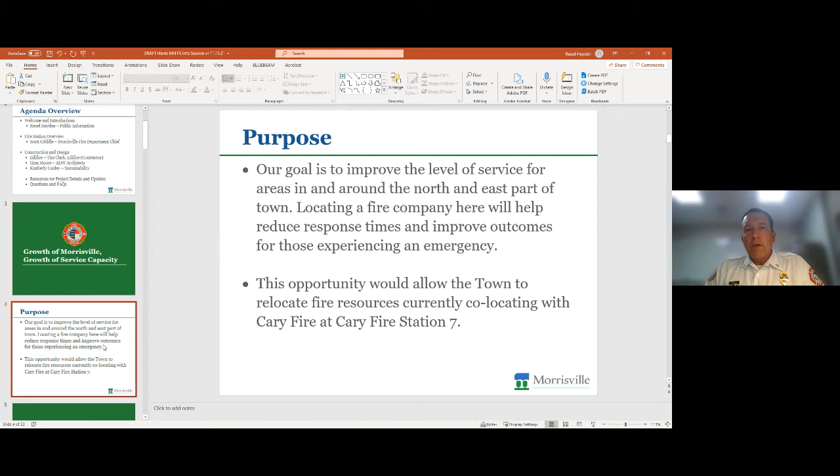Chief? Okay, Ruel, thank you for the introduction. If you would advance the slides to one more. So in general, the idea for adding another fire station is to improve service. The closer we can have a fire unit to every location, the more likely we are to be able to provide a better outcome in the event that you have an emergency. So ultimately, whenever we place a fire station, it's to improve the distribution of our units and improve outcomes.

This particular opportunity also allows us the opportunity to relocate a unit that is currently co-located with Cary Fire Department out at Fire Station 7. We do have some county responsibility; it is a paid-for service contract, and we have a unit out there co-located with Cary Fire Station 7. But we do have a seamless response set up with the Cary Fire Department that would allow us to improve the overall system distribution by relocating that unit into town, which benefits the town. Normally, when you add a fire station, you would end up adding a company at the very least, and in this instance, we won't have to do that.

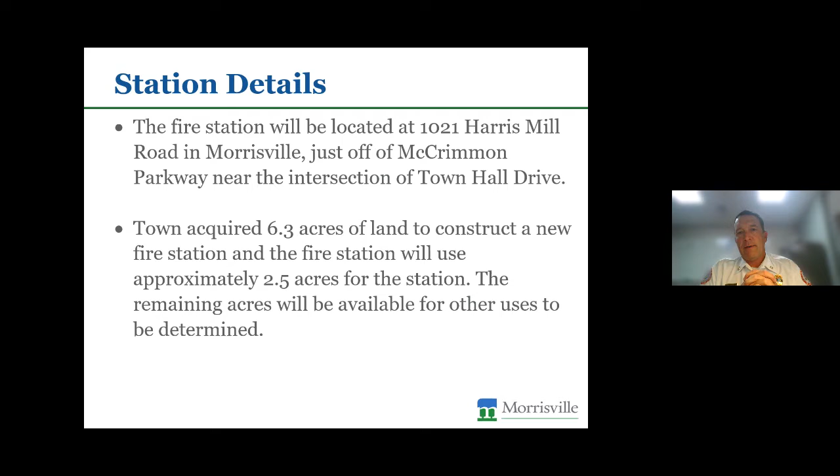We'll go to the next slide. So some of the station details: the station's going to be located at 1021 Harris Mill Road, just off McCrimmon Parkway, between Davis Drive and Town Hall Drive. We have acquired 6.3 acres of land to construct a new fire station. We're going to use approximately 2.5 acres of it, and the remaining will be available for other uses, but those uses haven't yet been determined.

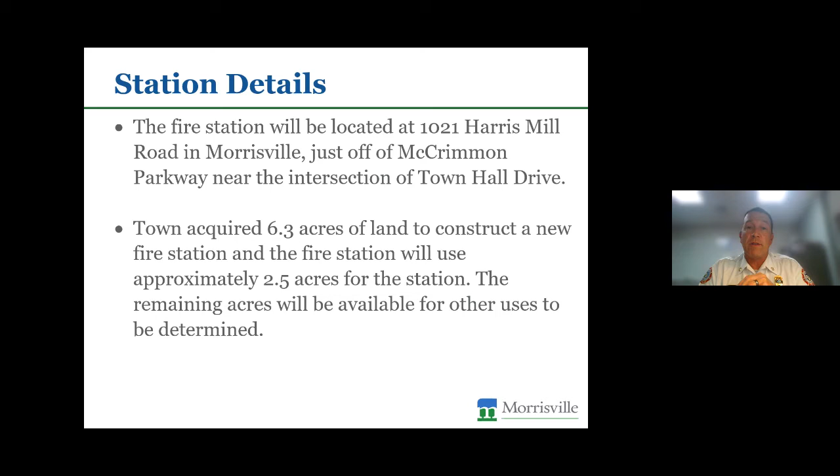Next slide. So currently, the building has been designed. It's moved into the construction drawing phase, and we landed at around 15,700 square feet with two double deep bays, office space for the work that's done there, living space, and personnel quarters. It's currently built for 9 staff, and we'll talk about staffing in a little bit, but it is built for some future expansion. It's built to have a battalion chief stationed there, and there is an additional half deep bay for EMS, with some dedicated EMS space.

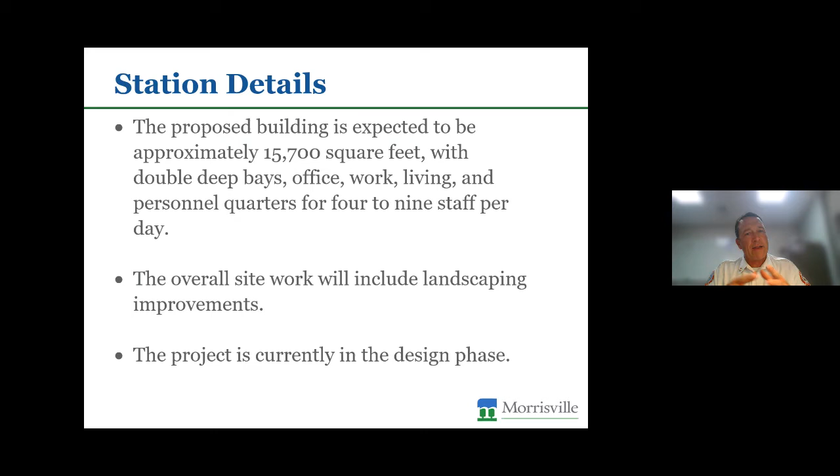The overall project will include a bunch of landscaping to make it compliant with the UDO and for the appearance to be proper. Like I said, we are just coming out of the design phase with this, and we are getting ready to work in — I think we've already applied for the permits, so construction drawings are actually drawn at this point.

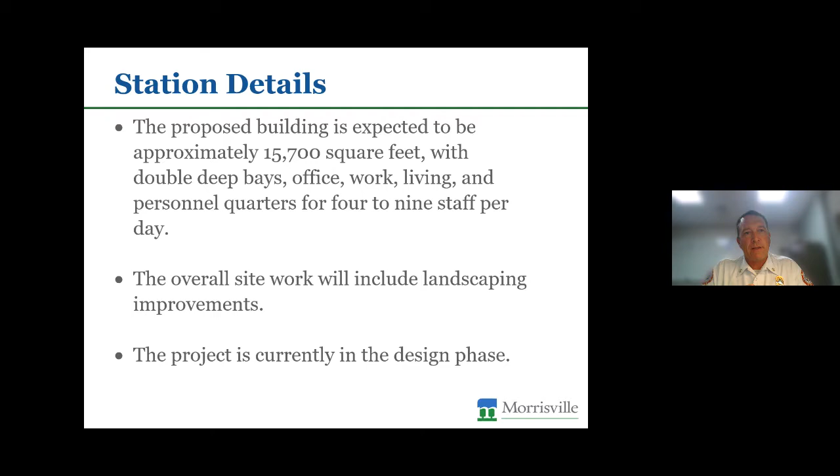So we're going to talk a little bit about fire station operations. These are probably some of the most popular questions that we would expect. The call volume out of this particular station at the moment — right now we're proposed to have one fire unit, a ladder truck, a battalion chief, and there's a Wake County ambulance proposed to go there. I don't have the exact data on the call volume of the Wake County EMS unit, but they are very busy.

But with that, oftentimes I will say that they do not initiate as many calls from the station as you would expect with as busy as they are, because a lot of times they receive their calls while they are returning from other calls or trying to clear from their last run. The fire unit that would respond out of that station will have relatively light call volume. It's hard to predict exactly because they're going to be moving out of a more rural area and coming into town, so some of the volume that comes out of that station will be taken off of Station 2 and Station 1 respectively. We expect there to be no more than 2 to 3 calls per day on average. That's a difficult thing - some days they might not run a call at all, or they might run 6 or 8 calls in a day. There's no telling, but on average we're expecting 2 to 3.

And the good news really is, with most of our calls throughout our district, most of them happen during the daylight hours. We can go to the next slide.

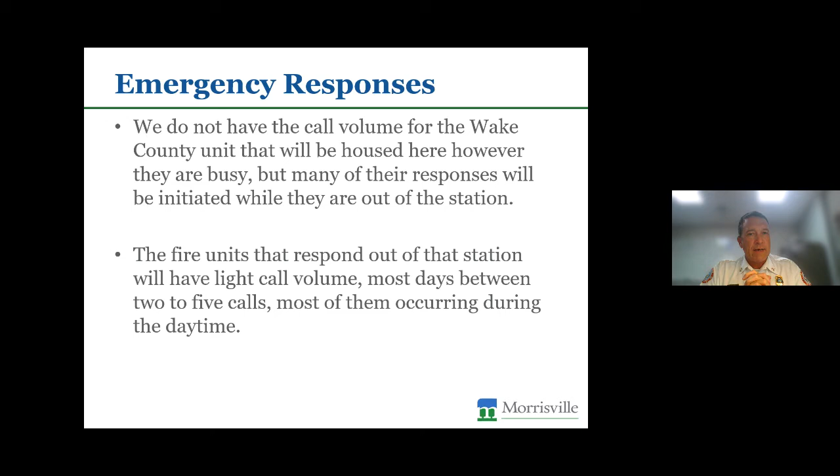Routine activities that happen in a station - obviously we put a premium on being ready for calls. So every single day our equipment's checked. Our shift transfers around 7 o'clock, and shortly after that, the crew coming on will make sure that the truck runs, it pumps, and all the systems operate. So there will be a brief system check in the morning. Daily, all the tools will be checked, though most of that happens just a while after the original shift change. The trucks will be washed.

Training will happen daily there. A lot of times the training we do will require the use of the ladder or the truck's pump, so the truck will have to run. But the training that creates any noise would typically happen during the middle of the day, and to be quite honest, it would not generate any real significant noise beyond your standard background. Especially if you live in Morrisville, we have a lot of standard background - planes, trains, and automobiles all the time. If you're outside trying to communicate, you're familiar with it. But I would say that the presence of the fire station and the general duties would not even approach that level of noise, not even close.

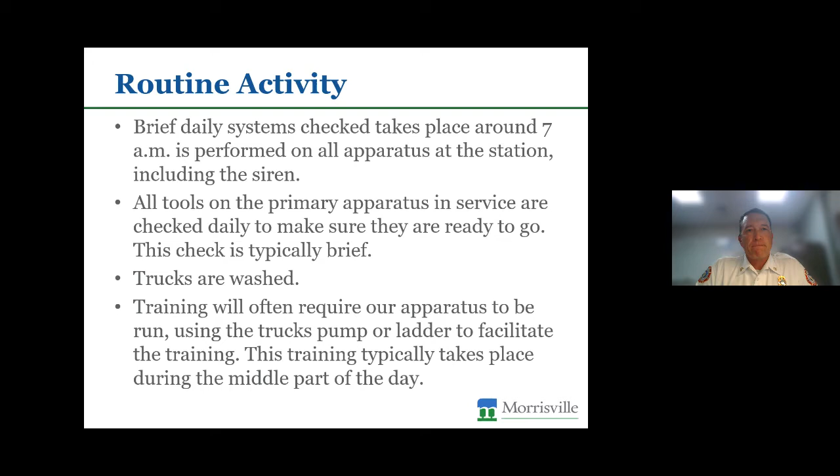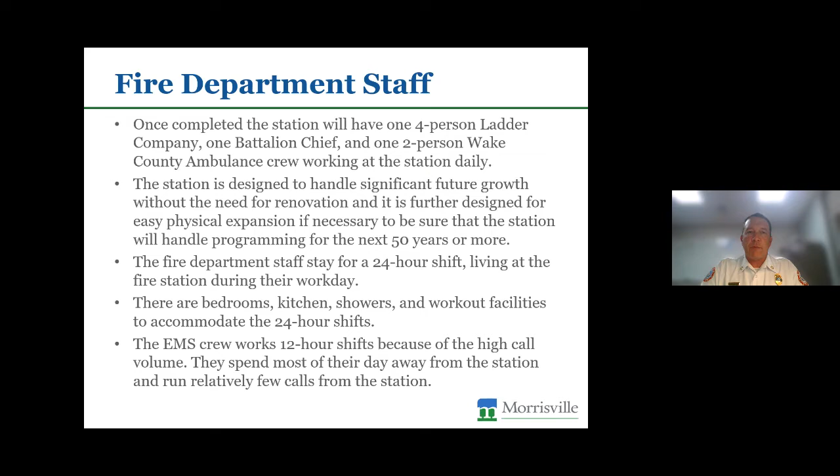So fire department staff that we're expecting in the beginning - although it is built for future expansion - we anticipate one ladder company to be stationed there with 4 people at its regular staffing, 1 battalion chief who will ride an SUV type quick response vehicle, and then 1 2-person ambulance company. There will be some spare apparatus there, but that'll be the primary staffing at the station. However, like I said, the station is designed in case the call volume in the area increases. We were hoping to get a good 50 or more years out of this building, and we wanted to make sure it was expandable. Many times, like Fire Station 1 currently has 2 companies, this building is built for that - to handle 2 companies up to 4 people each, plus the battalion chief and the EMS unit. So it's built for some future development.

Fire staff typically work a 24-hour shift, living at the station during their workday. There are bedrooms, kitchens, laundry facilities. Most of the time our staff get to sleep, and in the beginning of the station's life cycle it's anticipated they will sleep sometimes through the night. Sometimes they're going to get up 2 or 3 times a night, but yes, they do live out of the station. So the good news is that they're only going to come and go once a day, at least to come to work. And for now, it's a pretty limited number of them.

The EMS crew, however, they work 12-hour shifts. The volume at EMS is much busier. Despite the fact that they're anchored here, whenever they do get a chance to return to their home base, this is where they'll come. However, it's not super often that the ambulance is at the station. I don't anticipate that just because they're busy you're going to see an ambulance zipping in and out of there. And by the way, it seems like every time they run, it's a long time - it takes a long time to get to a patient, treat the patient, transport to the hospital, and then recently they're having a really hard time getting a patient discharged to the hospital. So each one of their runs is a significant amount of time.

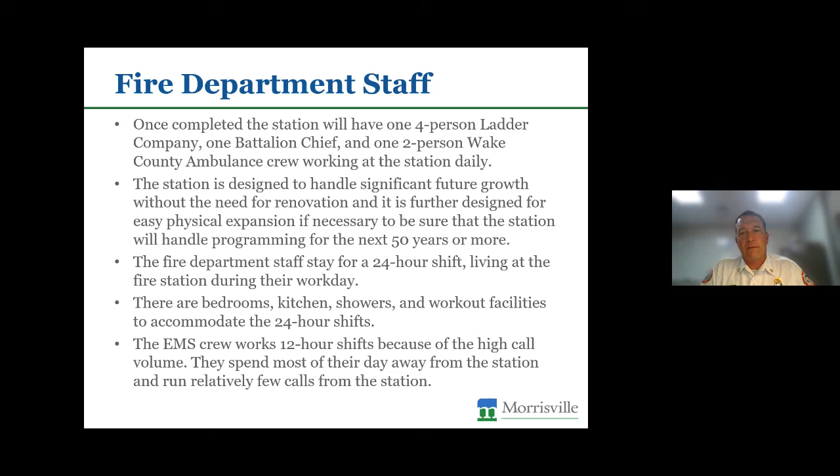So just from a living around a fire station or around a station standpoint, I don't think they're going to be that invasive. All right, next slide.

So typical traffic, obviously we're going to have a few runs a day. I don't expect that to be very many in the beginning. Obviously, as the town grows, the volume will continue to grow out of that station. So you've got the emergency runs.

The battalion chiefs switch, that's gonna be 2 people, 1 in, 1 out, 15 to 30 minutes, around 6:30. Then the 4 people that work there will come in probably between 6:30 and 7 o'clock, and the 4 being relieved will probably skedaddle out of there really quick after 7, unless they got some reason to hang around.

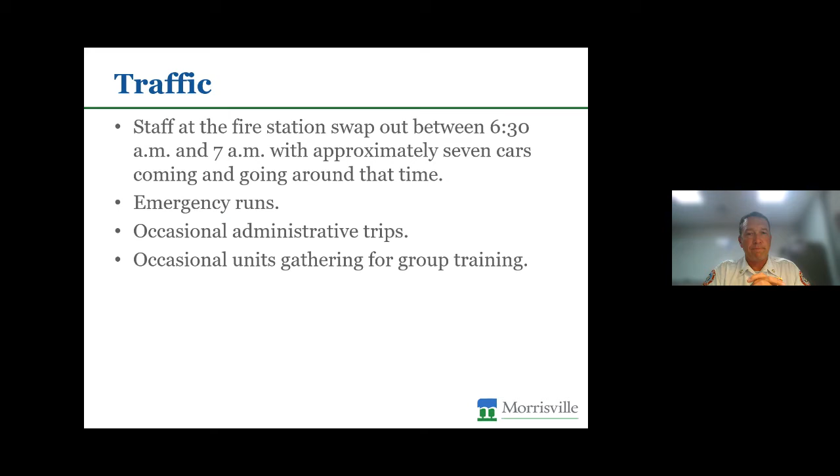The biggest thing we're going to hear over and over again is noise, and we respect that. One of the trade-offs to having a fire truck in your backyard is having a fire truck in your backyard. We are close to you. We can help mitigate an emergency relatively quickly, but yes, there is some noise involved.

What we can do to help that is, when they're checking off equipment, we can ask them to do it behind the building for the most part. We can ask them to be respectful around the morning time when they're running the sirens. Most of the sirens that we run elevate and come down, and just to check them off, we don't have to wind them all the way up and be super loud.

So we can mitigate that in a behavioral way. To be honest, we're in other communities and we do not very often receive any noise complaints. I've been fire chief for around 3 years now, and I have not yet once received a noise complaint about fire crews winding up sirens early in the morning. So I do understand that's a concern, but fire stations are in neighborhoods all the time.

We're hoping that the benefit is well worth it to you. We're hoping we're not very invasive, but if you live in proximity where noise is actually a concern, the trade-off should be that if you actually have an emergency, you get a very quick response and the best possible chance of a good outcome.

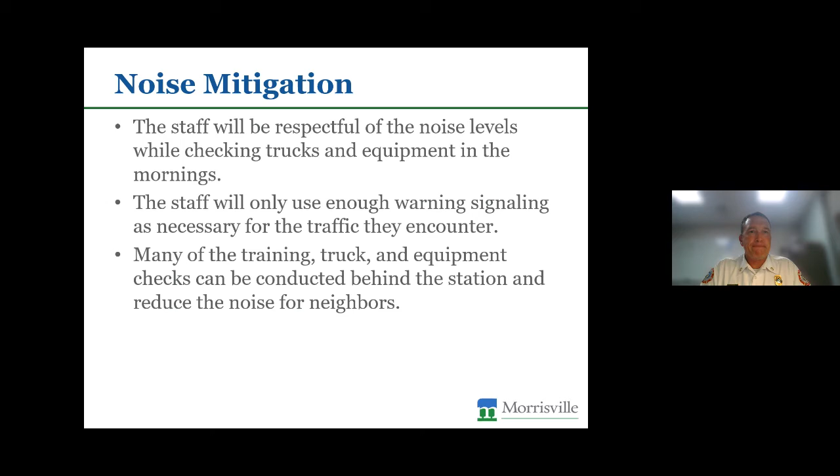Was this me or am I continuing on real well? You're muted. Yes, this section. Okay, all right.

Just in the beginning of November, during the election, we received a GO Bond, or permission to pursue a bond. And the portion that's dedicated to this project is $8 million.

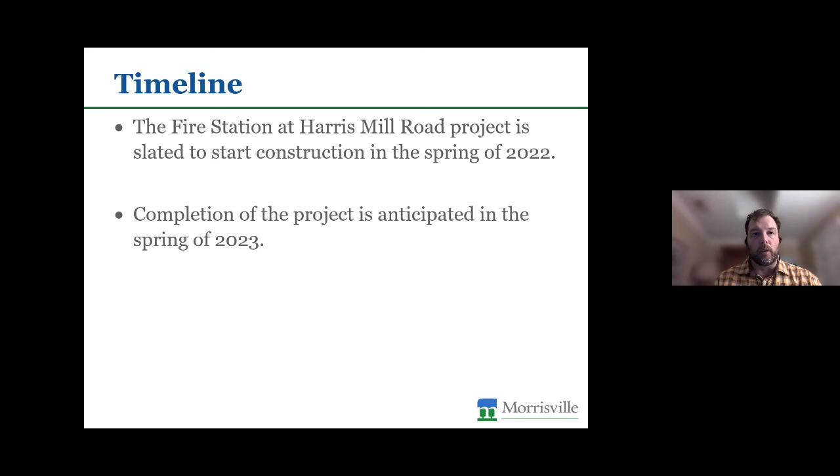So you can see this graphically: our anticipated timeline shows we're growing close to the end of the design phase. We are square in the middle of permitting and have made it through the site permitting effort, so all of the UDO requirements have been checked, and we are in for building review. We're currently working through that process and getting ready to pursue the bidding phase.

If any of the folks on the call are interested in bidding, there are links available within the Town of Morrisville website that will allow you to get in touch with Edifice. We have our pre-construction manager, Cody Treese, on the line as well. Either him or our pre-construction administrative lead, Jessica Poblate, will be the primary contact if you're interested in bidding.

As I said, we are gearing up to start construction in the spring of 2022 and turn over about a year from that point.

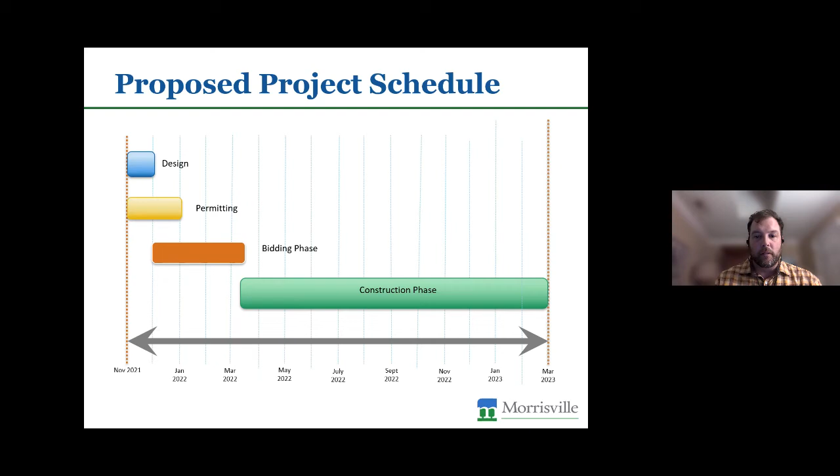One of the focuses we put a lot of emphasis on when constructing buildings close to residential areas is being a good neighbor. We're going to be very deliberate about how we build the project and how that affects our neighbors. In a minute, we'll show you a logistics plan, which is our forward thinking about what the project may look like and how it may function. The overriding theme of that logistics plan is how to be a good neighbor to everybody within earshot of our project.

What we've found over the years is that the very best way to evaluate how to be a good neighbor is measured by how we affect the five senses. So seeing and hearing, even touch and taste, are things we try to manage. We try to think with the end in mind and how it's going to affect you.

Whether that's our screen fence that's going to keep our staff on site doing their work and not entering places they shouldn't, but I'd imagine there's plenty of children in the area, and that fence is going to keep them safe, keep them off an inherently dangerous area with equipment moving around and a lot of heavy things that could put them in danger. So we are very mindful about managing that.

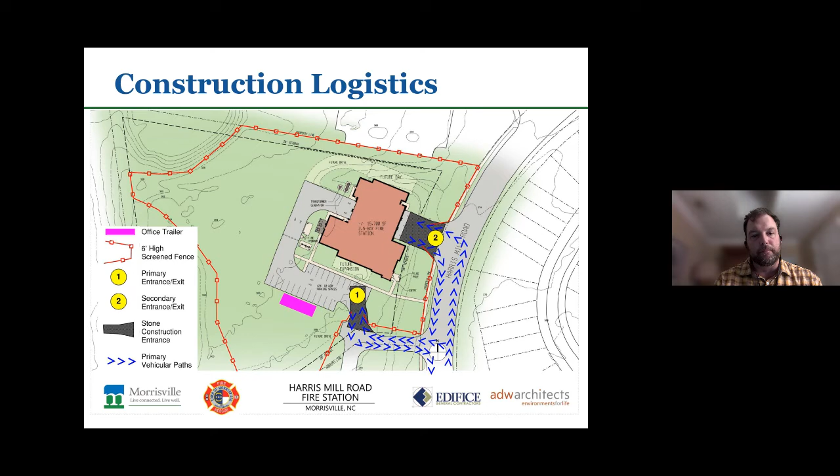All right, and Gina, are you able to share? If not, I'll try and pick it up as best I can. Yeah, Tim, I don't see her on.

Okay, so I'm going to give this my very best shot. The site, as everyone is aware, or maybe not, is located right off of Harris Mill Road, very close to McCrimmon Parkway. It is a several acre site. We are developing about half of that property with a hope that there is the ability to develop the remainder down the road.

The fire station and the EMS component are roughly about 16,000 square feet. There'll be dual entry for the fire trucks so that they don't have to back up into the apparatus bay, so they can make a full pull through to the apparatus bay, which should help with traffic flow as well as keep the building pretty safe. That's a big piece of equipment to get in and out of a building, and you could imagine backing that up, it's fairly precarious. There will be some amenity areas.

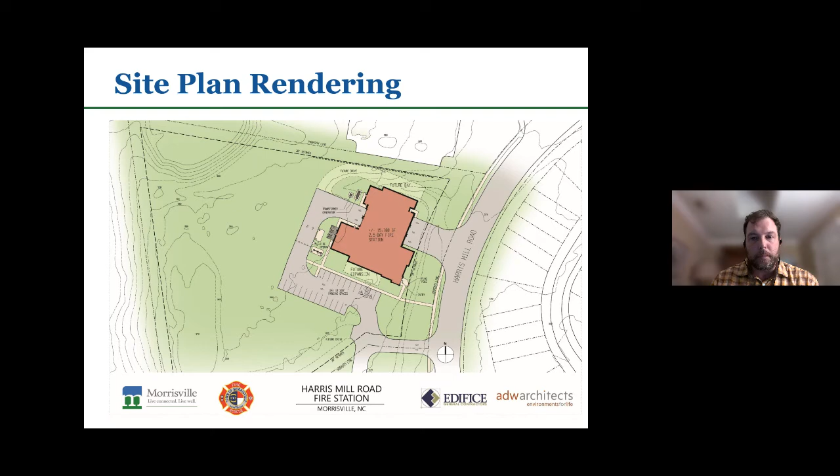But I'll spare you the details. We also look at these facilities in a mindset where the gentlemen and ladies that are serving the community, they live there for a great portion of their lives. So not only do we look at it from all the needs of the service portion and what they have to do to keep the community safe, but we also want to give them the opportunity to relax when they're afforded that time during their day.

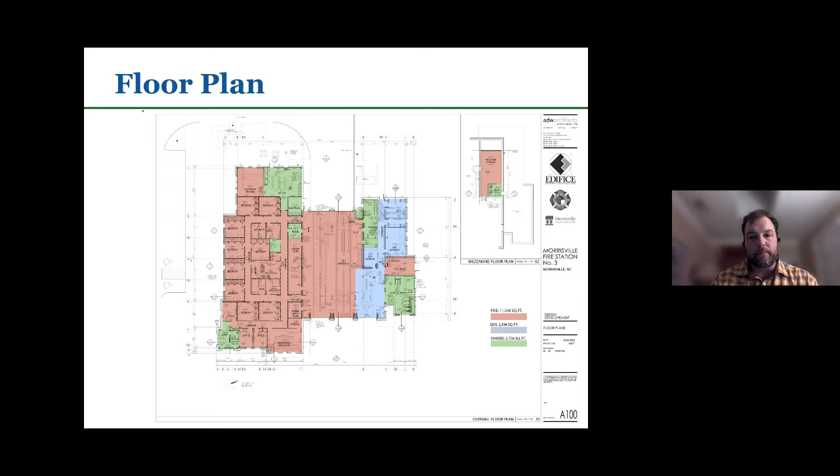All right. So as you can see, the vast majority of the fire station component in orange is really dedicated to the comforts of home. Bedrooms, modestly planned with some ability to store some of their private belongings, clothes, maybe some things to bring the comforts of home into the workplace, so when they do have the chance to relax, they can.

Also the place that keeps all the firemen happy, the large kitchen where they can fellowship together and enjoy meals, build the camaraderie that's necessary to an effective team. Of course, the apparatus bay, being the showpiece of every fire station, is located in the center.

I think Chief Criddle mentioned to me the other day, hopefully I'm not overstepping my bounds, but they do host a good bit of open houses. I remember bringing my child into the fire station, and when they walked into the apparatus bay, just oohing and ahhing at all the neat equipment and the fire trucks. So we put a lot of focus in not only the design, but the construction of that to make sure everything looks nice and neat, very clean construction, so that you folks as community residents can have that same experience and share that.

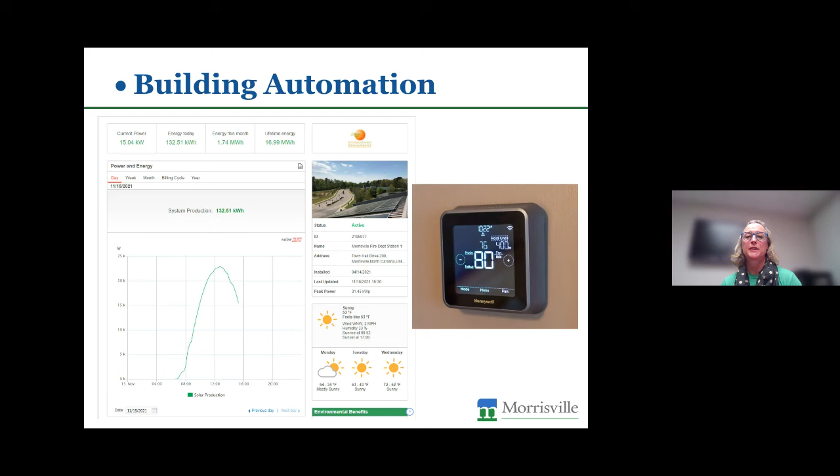All right. Tim, would you like to take the next portion.

Sure. Yeah. Tim, would you like to take the digital renderings? You bet.

Okay, so again, I'll try and do my very best Gina impression here.

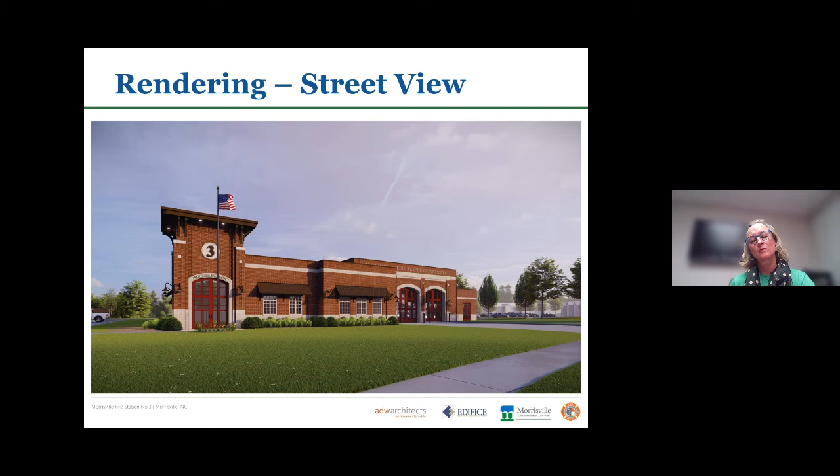So as we vetted through the options for the fire station, one of the things we look at is a building that's going to last 50 years. Architects design buildings with that in mind, whether it is really intended to be a building that may only be around for 20 years—they can take some shortcuts in its structure and the materials used to construct it. This building is meant to be one of those landmark buildings that's going to be around and utilized for its intended purpose for quite a while.

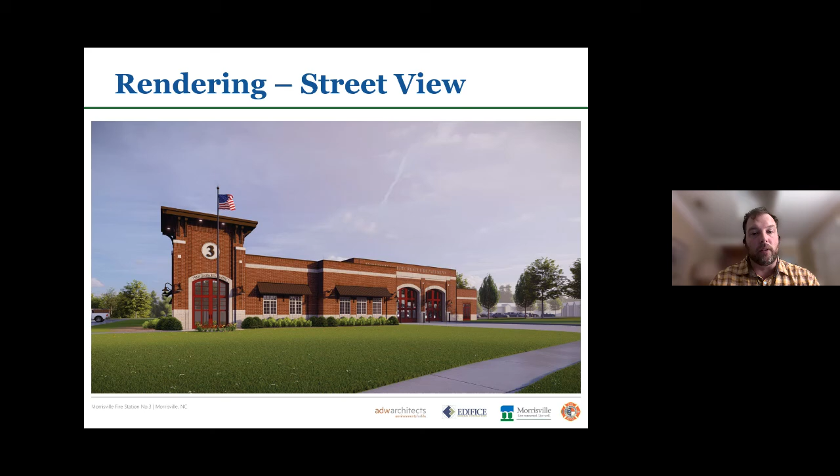So we want to build it very stout. We have elected to use some block construction coupled with a steel structure to develop the frame. Used very robust and long-lasting materials in masonry and cast stone to develop a very nice veneer. And it serves as sort of that, what I think they landed on, a sort of transitional look. It's not a completely traditional style from an architecture perspective, but it's also not very modern, as you're seeing a lot of buildings that are built with metal panels and very white, gray, black materials. It sort of spans that gap a little bit.

They have very nice bifold door or fourfold doors on them, which not only does it provide a very nice aesthetic, which are represented in the photograph, but it also decreases turnout time. So it allows for Chief Criddle to mobilize his units as fast as possible and as safely as possible.

All right, thank you, Tim. Appreciate that. So with that, that is our list of presentations from our experts on this project. We're going to move into our FAQs and questions from the audience. We've got a couple here, frequently asked questions that I'll ask out loud for the presenters.